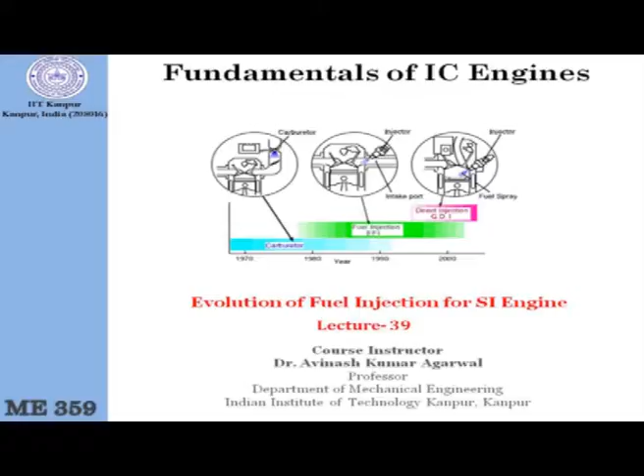Good morning. Today I want to discuss the evolution of fuel injection systems, especially for spark ignition engines. In this lecture we will discuss the conventional fuel injection system that we have been using for almost a century now, the carburetor, and then the evolution into the next generation, the port fuel injection system, and then the latest addition to this series, the gasoline direct injection system. So today I will be covering some of these aspects.

If you look at the history of fuel injection system development, the people who designed IC engines in the beginning, Nikolaus Otto and others, always had this dream that we could inject gasoline directly into the engine cylinder, which would help achieve very high efficiency similar to diesel engines, and also cater to very high power output from the petrol engine. But that did not happen because petrol requires more time to evaporate in the combustion chamber, and its auto ignition temperature is also very high.

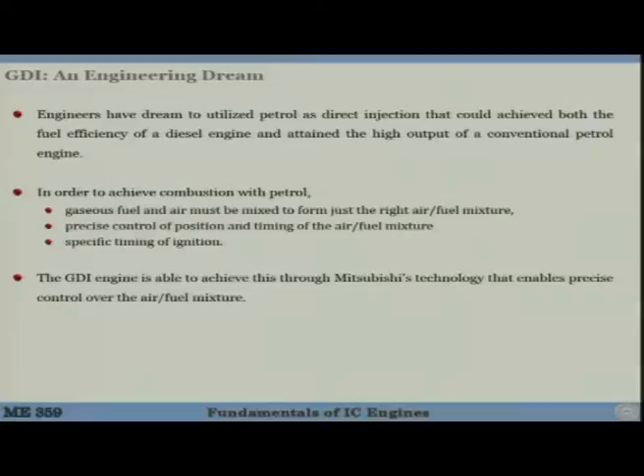So in order to achieve combustion with petrol, what is required is to mix the fuel and air to form just the right quantity of fuel-air mixture, control the timing and position of the air-fuel mixture in the combustion chamber, and then at the right time apply the spark. This had to be done, and for almost 100 years we could not do it due to a variety of issues. It became possible only in the last 20-25 years, when a lot of electronics was introduced, making it possible to achieve control over all these processes.

Mitsubishi company from Japan is one of the lead companies which developed this technology, and they are the pioneers. After that, of course, there are a lot of other automotive companies which have developed one or other variant of this technology, and we will be looking at some of these aspects.

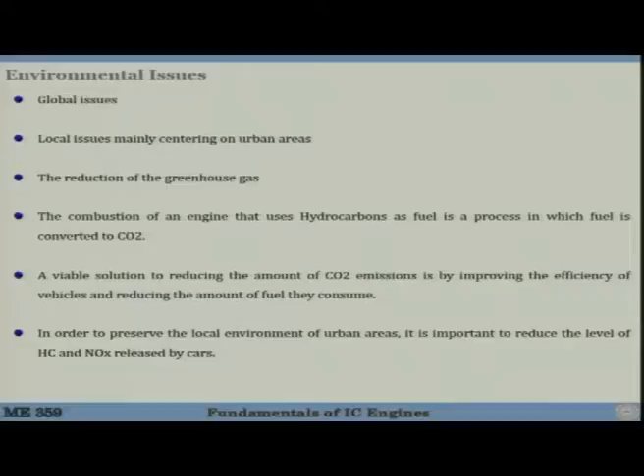Coming back to general aspects, there are many global issues and many local issues related to pollution. There is a requirement for greenhouse gas reduction, and when we talk about greenhouse gas reduction from gasoline engines, we always talk about increasing fuel efficiency, so that for the same kilometer travel you burn less fuel, and therefore put lesser carbon dioxide into the atmosphere from combustion of hydrocarbon fuels. So any efficiency improvement initiative for increasing the thermal efficiency of gasoline or diesel engines helps address global GHG emission issues.

It also helps address local pollution issues, because an engine running efficiently will put out lesser carbon monoxide, lesser hydrocarbons, and lesser NOx into the atmosphere. If you can achieve reduction of all these three by making an efficient engine, you address not only local issues but also global issues, and GDI technology addresses both of these to a large extent in SI engines.

Coming to CO2 reduction, there are many technologies available that enable major reduction in CO2, but sometimes these technologies require a very heavy engine, or many additional subsystems that need to be incorporated. When you manufacture those components or subsystems, you end up putting more carbon dioxide into the atmosphere than they will save over a lifetime, and you also put in a lot of CO2 when those components are recycled at end of life. That is one major issue, and GDI engine does not require any major alterations.

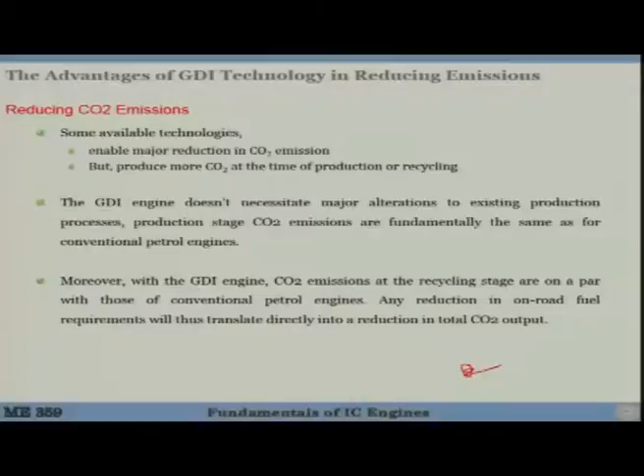So you are putting less amount of CO2 into the atmosphere during the usage time. That way you can actually reduce a significant amount of CO2 being put into the atmosphere. Then there is the issue of reducing carbon monoxide, hydrocarbon, and NOx emissions.

As I said, Mitsubishi company is developing the GDI and they are meeting the most stringent emission norms. They use a lot of features incorporated in the GDI engine, which enable a huge reduction in carbon monoxide, hydrocarbon, and NOx emissions.

Some of these features include earlier activation of the catalyst by two-stage combustion. We all know that gasoline engines have a three-way catalytic converter, and it requires a certain light-off temperature to get activated before it starts reducing HC, CO, and NOx emissions. With a GDI engine, you do two-stage combustion, and the light-off temperature is obtained very quickly, relatively much more quickly than conventional engines. So you are putting out cold start emissions to a much smaller extent compared to conventional engines.

That is one part. The second part is that you increase the exhaust gas temperature and design the exhaust manifold so that it decelerates the flow. There is more time available for hot gases to do heat exchange with the catalyst, which maximizes this effect. Then you put a high volume EGR, and EGR reduces the peak temperature inside the combustion chamber, so NOx formation reduces. Whatever small amount of NOx forms, you take care of it using a lean NOx catalyst.

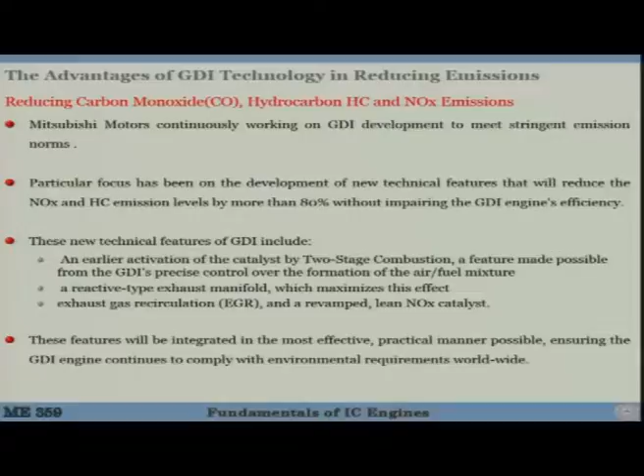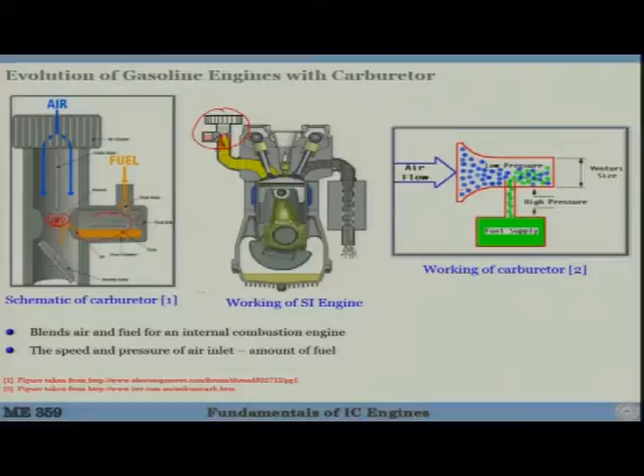When lambda is 1, it is a stoichiometric mixture. When lambda is less than 1, it is a rich mixture, and when lambda is more than 1, it is a lean mixture. So most conventional car engines use port fuel injection technology.

Now the trend is that, in order to generate more power more efficiently, you try to put in leaner mixtures at high pressure. So you use a lean burn engine with turbocharging in order to control emissions and to get higher thermal efficiency.

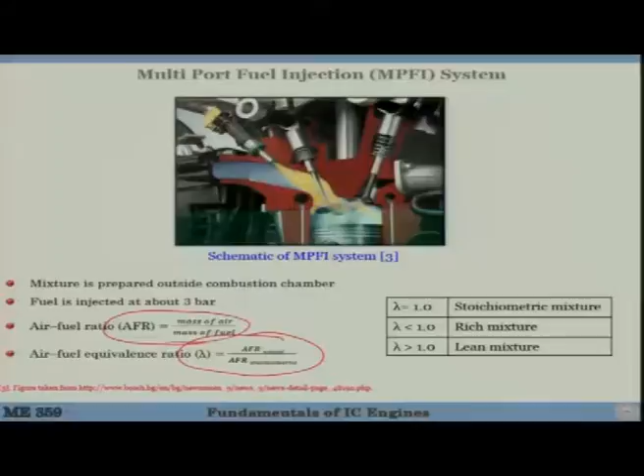Then around 2000, gasoline direct injection technology emerged, where gasoline is directly injected into the cylinder using an injector. This technology was developed by Mitsubishi, and now a large number of cars in the world, unfortunately not so much in India, are using gasoline direct injection technology.

To reiterate, in a carburetor, fuel comes in through a float chamber, air is coming in, and this works on creation of vacuum in the intake manifold. In the port fuel injection system, you inject the fuel in the manifold, and when the intake valve opens, the air fuel mixture comes in. In a GDI engine, the fuel is directly injected into the combustion chamber, only air is taken in through the intake valve. This is the subtle difference between these three systems.

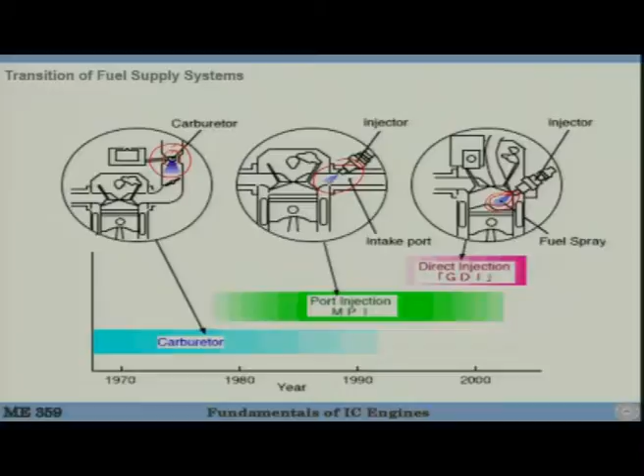Now let us compare these three systems and the progress made over the period. Here you see the air fuel ratio - this is the rich side and this is the lean side. Obviously you would like to move into the lean direction, and when you move that way you also move in terms of fuel economy. So here you have higher fuel economy, here low fuel economy, here high fuel economy.

This is where the carburetor is - it works either on the rich side or very close to stoichiometric, and its fuel economy is not very good. Port fuel injection improves the air fuel ratio, working on leaner mixtures and giving better fuel economy. Diesel engines operate on overall very lean mixture and give much better efficiency, but the GDI engine, which operates on gasoline, actually has a much leaner mixture overall, and gives efficiency as high or even better than diesel engine.

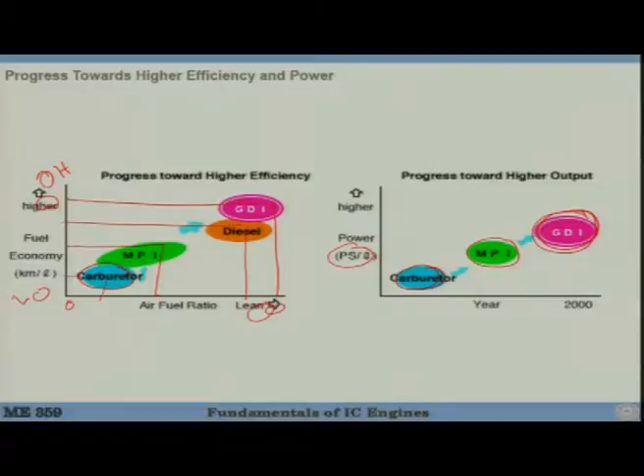Coming to power output, you can see 1980s carburetor power per liter - how much kilowatt or BMEP you can generate - and then here you have port fuel injection. The per liter power output from an MPFI engine is actually much higher than carburetor, and the GDI engine, in spite of being more efficient and using lean mixture, is able to give more thermal efficiency and more power output. So this is a win-win situation - you are not losing on any of the fronts required.

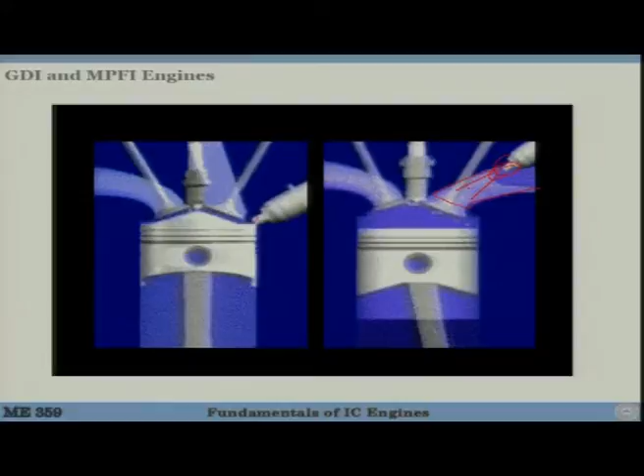This is another figure which shows the difference between PFI and GDI. In PFI you have this intake port here and the fuel injection is done in the intake. This is the GDI engine - there is a cavity here and the spray is done when the piston moves down. So this is the subtle difference between GDI and PFI engines.

Now this animation shows clearly what happens. When the intake valve opens, only air is taken in, and you can see a very peculiar shape of piston that rotates and changes the direction of the intake air. The direction changes, and while it's changing you inject the fuel at that time. So the fuel along with the air moves and gets concentrated very close to the spark plug, forming the mixture right in the vicinity of the spark plug.

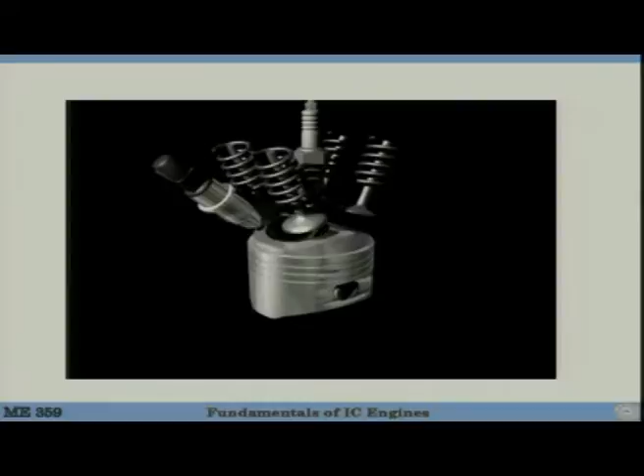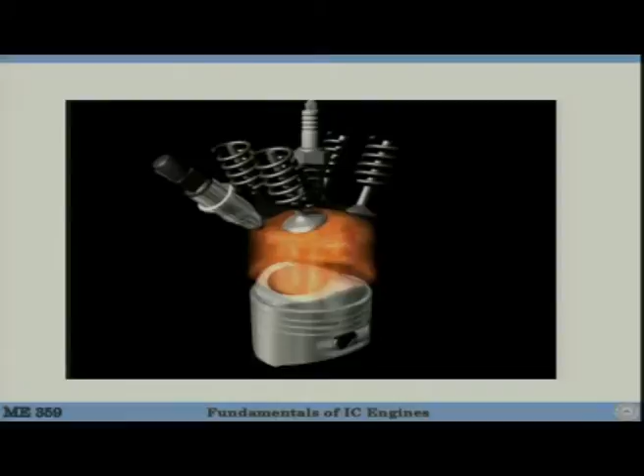The spark is applied, and the rest of the areas are deprived of fuel. So overall it is a very lean mixture, but very close to the spark plug you have just the right mixture at the right time. When you apply the spark, combustion takes place, and this animation shows in practice how the GDI engine actually works.

Okay, so if we look at the current status of the gasoline direct injection engines, they are extremely popular in the road transportation system because of the advantages they offer.

GDI engines are more powerful, GDI engine fuel economy is better, GDI engines emit lesser carbon dioxide, carbon monoxide, hydrocarbon, and NOx emissions, and their weight is similar to conventional engines. So what more can you ask for? These are the reasons why GDI engines or variants of GDI technology are very popular in the road transportation sector, especially for the car segment, mid-size segment.

Carburetor and manifold systems, as I mentioned earlier, work more or less on stoichiometric or close to stoichiometric mixtures. But the GDI engine works on a very lean mixture overall, giving very high efficiency and high power output, while close to the spark plug the mixture is rich.

The GDI engine actually runs on two different modes. One is the stratified mode. When operating under lean conditions, or when you want less power output from the engine, you inject a very small quantity of fuel toward the end of the compression stroke. It concentrates very close to the spark plug, and as a result, with very little fuel you generate part power output. So on all part load conditions, stratified charge operation is used.

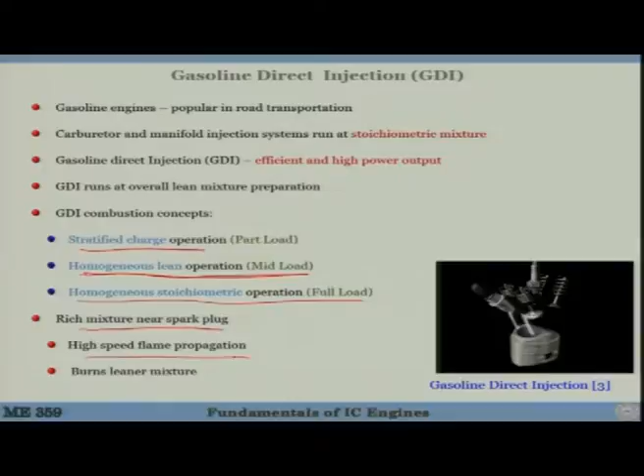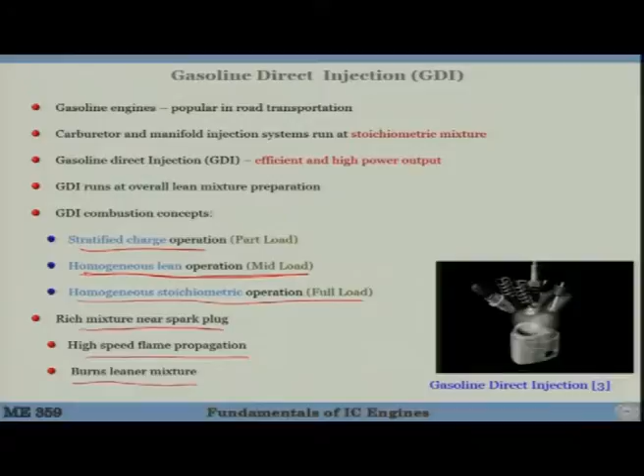There is a rich mixture very close to the spark plug, causing high speed flame propagation, while in other areas you burn a leaner mixture. So very close to the spark plug you have a rich mixture, and around it there may be either no fuel or very little fuel, forming lean mixtures.

If you look at the schematic, there are many types of gasoline engines. Here, this is a centrally located injector, and you can see the fuel is injected directly into the cylinder, so mixing takes place in the combustion chamber. Overall mixture strength can vary from lean, which gives very high efficiency, to almost stoichiometric, which gives high power output. Formation of carbon monoxide, HC and NOx is very low from the gasoline direct injection engine.

Fuel injection pressure is much higher than in a port fuel injection engine. In port fuel injection, fuel is injected at 3 bar. In a GDI engine, it varies from 50 bar to 200 bar. In a common rail direct injection diesel engine, injection pressure ranges up to 1600 to 1800 bar. So compared to diesel this is much less, but compared to gasoline port fuel injection, this is much higher.

Here, the best part is that you actually use the motion of the air, which could be swirl motion or tumble motion inside the engine, generated because of the special geometry of the intake manifold as well as the geometry of the piston. This helps in achieving the objective of formation of a homogeneous mixture, especially at full load conditions.

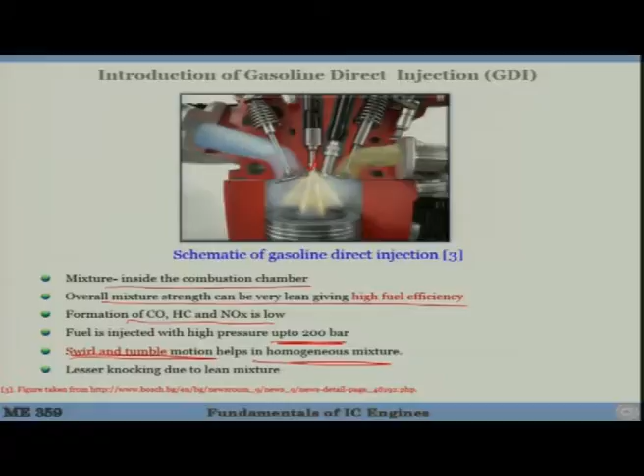So in the combustion chamber of a GDI engine, you either have a rich mixture or a lean mixture, you do not have a stoichiometric mixture. The possibility of knocking is highest in a stoichiometric mixture. Because of this reason, a homogeneous lambda equal to 1 mixture does not exist; it is either lambda less than 1 or lambda more than 1. So the possibility of knocking is actually much less here.

Okay, so if you look at these different variations of GDI engine design, there are a few shown here. As I mentioned, when the piston is coming up at the end of the compression stroke, you are doing fuel injection. This condition is stratified charge, meaning you are operating the engine in part load condition.

Homogeneous charge means when the piston is going down, you inject the fuel and have a lot of time available for mixing throughout the combustion chamber, forming the homogeneous mixture. This kind of condition is used for catering to high load conditions.

There is a spray-guided design engine combustion chamber where you have a spray and your spark plug is located very close to the spray. Then there is a wall-guided GDI engine system where the wall of the piston and cylinder guides the spray to come very close to the spark plug. And then there is air-guided design, where air motion, the swirl motion and the tumble motion, helps the fuel come very close to the spark plug. So these are the main different types of combustion chamber designs for GDI engines.

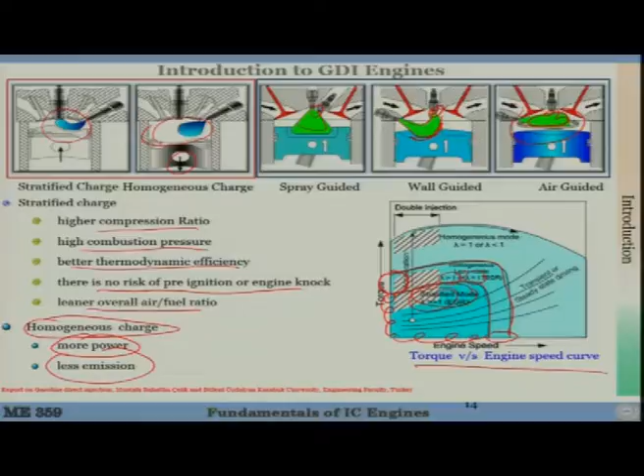And then if you want to operate the engine at further higher speed with more torque expected, you have no choice but to go for homogeneous mode where you do intake stroke injection. You can also sometimes use double injection. Here lambda is 1, or sometimes if you want to really produce a lot of power, lambda can be less than 1. That means you will put in less amount of air and more amount of fuel, so lambda will be less than 1, meaning the mixture will be rich.

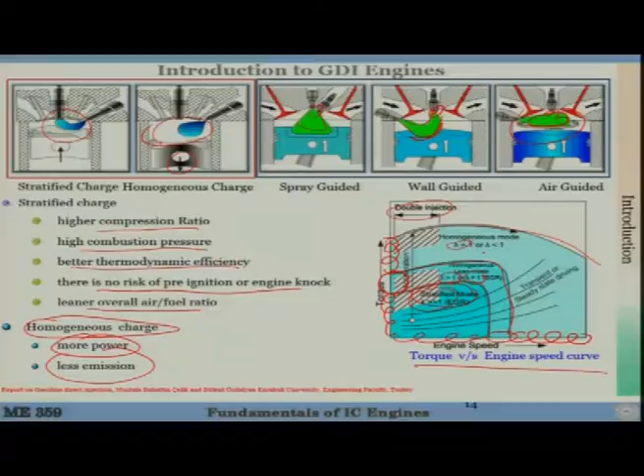So as I said, this is the same curve explained earlier: engine speed on one axis, engine torque on the other. Here you have less fuel consumption because the mixtures are lean. Overall air-fuel ratio can be as high as 30 to 40. If it were a homogeneous mixture, you couldn't expect the engine to run, but since it's a heterogeneous mixture, doing end-of-compression-stroke injection very close to the spark plug, the fuel-air mixture gets concentrated there. That's why, in spite of the overall ratio being 30 to 40:1, you are able to operate.

In the superior output mode, you need high power and high torque, so you are doing intake stroke injection, and here the air-fuel ratio can vary between 13 to 24. 15 is the stoichiometric mixture. So you can see, if it is homogeneously lean, it could be 24 for catering to mid load, mid speed conditions. If it is full load, full speed, it will be 13 to 18 air-fuel ratio.

Now, compared to GDI engine, compared to PFI engine, the GDI engine has much better volumetric efficiency, and that also helps us in getting more power output. Here the curve shows engine speed on the x axis, volumetric efficiency on the y axis.

You are injecting the fuel in the port, and so this is the volumetric efficiency of the conventional port fuel injection. In a GDI engine, what happens is that when you are either in the intake stroke or at the end of the compression stroke, you are injecting the fuel directly in the cylinder. It is in liquid form, and once you inject the fuel, it has to vaporize, and once it starts vaporizing, it will absorb latent heat of vaporization, and it will bring down the charge temperature.

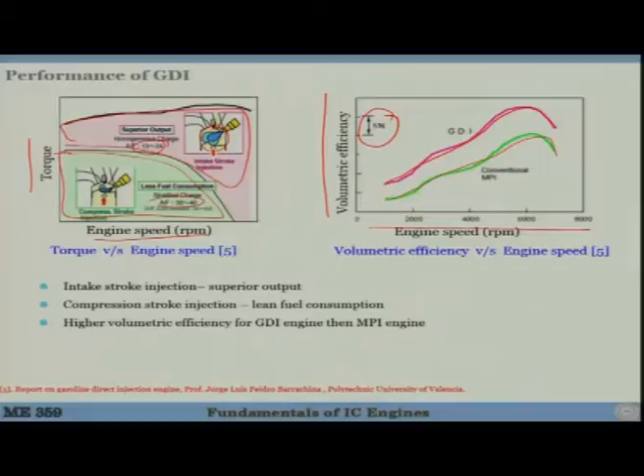So these are all positive things, but there are certain limitations also. The limitations include that there is sometimes difficulty in finding space for an injector to be mounted in the head. If you have a 4-valve design, in each cylinder head you will have 2 intake valves, 2 exhaust valves, 1 spark plug, and on top of it you have to find space for 1 extra injector, and that can really be challenging. You can find that space very easily in 2-valve per cylinder engines, but in 4-valve per cylinder it could be a little bit of a problem, and so head design becomes challenging.

Because of the challenging head design, you will be adding cooling issues. So cooling of the cylinder head will be challenging, casting of the cylinder head will become more complicated, and there are more refinements required for idling, and there is greater need for control of emissions, because most of the GDI engines are expected to meet Euro 6. So emission control has to be perfect.

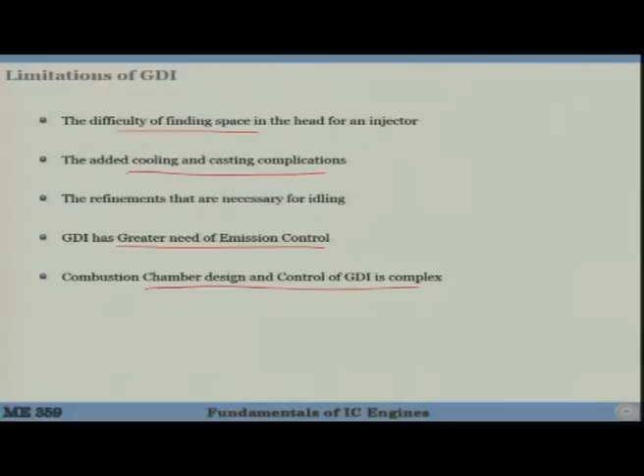Combustion chamber design and control of GDI is rather complex, because it is very difficult to manage GDI kind of combustion without the use of sensors. You need a very huge suite of sensors and ECU.

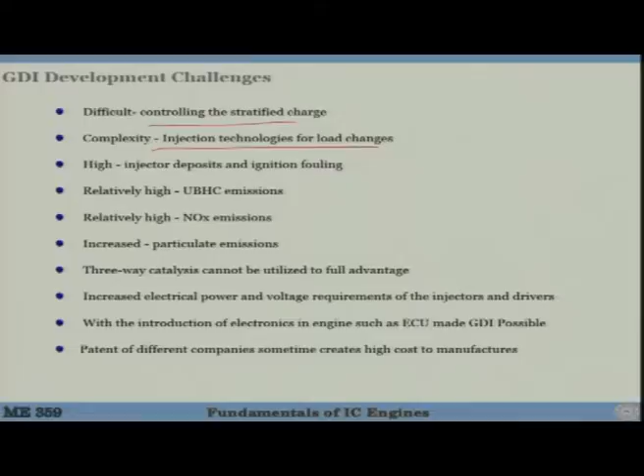So the development challenges of the GDI include difficulty in controlling the stratified conditions. It's complex injection technology, where the injection pattern changes with load changes in low speed and low power conditions. You are actually injecting during the end of the compression stroke. In high load and high speed conditions, you are injecting during the intake stroke. So this injection timing becomes dependent on how much accelerator you are pressing, and that makes this whole control more complex.

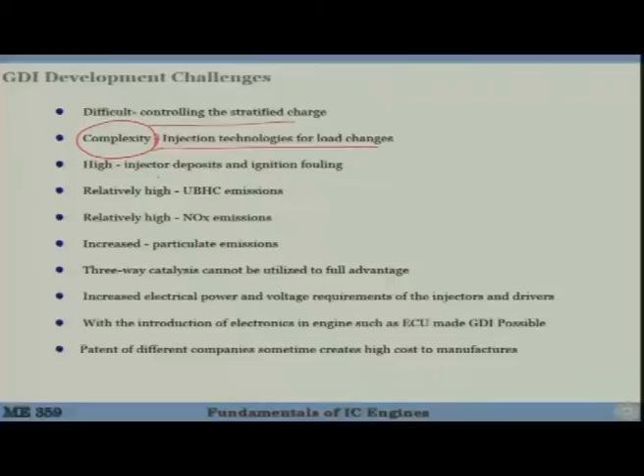You are injecting the fuel in liquid form inside the cylinder, so the injector really remains cold, and rest of the things inside the combustion chamber are hot. So there is a thermophoretic pressure on all the particles that are generated. They deposit on the injector, and there is a lot of problem with injector deposits, and sometimes even if you have liquid droplets going into the spark plug, the spark plug can actually get fouled, so if you don't design your system properly, you may end up fouling the spark plugs quite frequently.

There could be a problem of unburnt hydrocarbons. If you don't design it properly, the NOx emissions could be high, and obviously since you are putting a lot of fuel and there are fuel rich regions inside the combustion chamber, particulate emissions from gasoline direct injection could be a real problem. You will be amazed that PFI and carburetor engines do not have a problem with particulates, but in the case of GDI engine, particulate emissions is a real challenge to tackle, and this is probably one of the biggest challenges.

All other things are very easy to control, but this is quite challenging. Three-way catalysis cannot be utilized to full advantage, this is also one of the challenges. You have increased electrical power and voltage requirements for injectors and drivers, because everything has to be electronics controlled. With the introduction of ECU and electronics in the engine, GDI engine is possible, but that makes it quite complex.

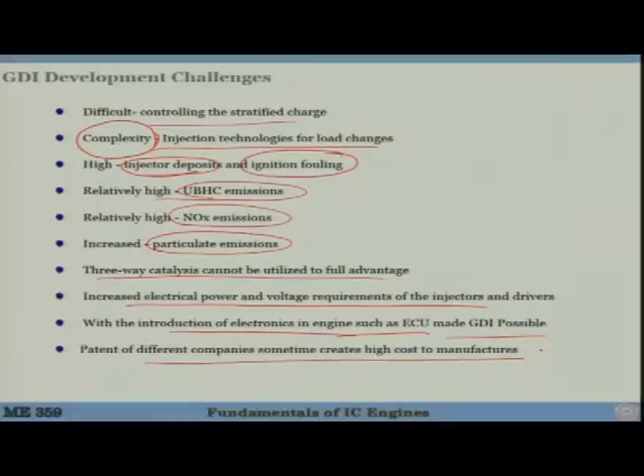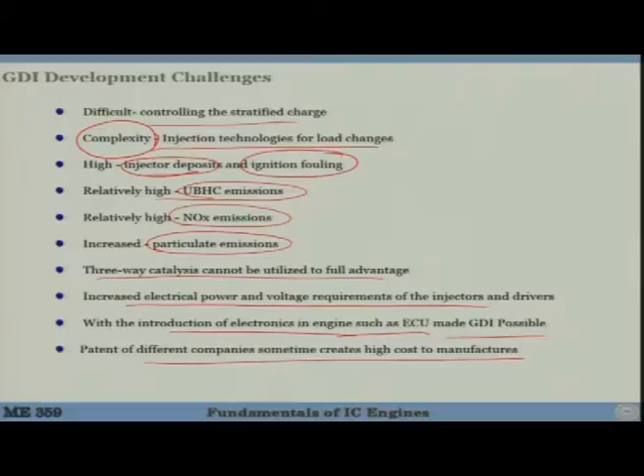Mitsubishi has most of the patents, but other companies are also filing their patents. If you want to develop this technology on your own, either you have to lease the patents from other companies, or you may get into a conflicting situation with them, which will increase the cost of manufacturing a GDI engine if you have to pay very high fees for patents. So this is one of the limiting factors.

The major objectives of the GDI engine are: first, you want ultra low fuel consumption compared to even diesel engines. The GDI engines have to be much more efficient, and you also want superior power compared to PFI engines. So these are conflicting goals - you want to get more power output, but you do not want to invest so much energy. You want the fuel consumption to be further lower on a per kilowatt hour basis.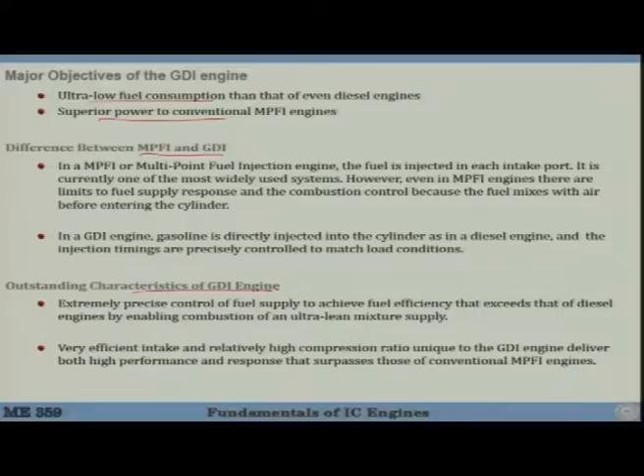I have already explained the difference between MPFI and GDI very clearly, and also explained the features of GDI, so I will skip that. Now let us look at how we really make this happen at a technical level. I will explain the distinguishing features of GDI which make this whole concept possible. As I said, there are two combustion modes.

The first mode is stratified charge mode, also called ultra-lean combustion mode. The second mode is homogeneous charge, called the superior power output mode. Under normal driving conditions, when you just started the engine or when you are running at low load, low speed conditions, you want to operate on ultra lean mode. That means you do the injection of fuel towards the end of the compression stroke.

For superior power output mode, when you are accelerating or going on a highway at very fast speed and need more power output, you inject the fuel during the intake stroke and form a homogeneous mixture. This is very similar to what you see in a port fuel injection engine. The only difference is that you will produce more power than a PFI engine.

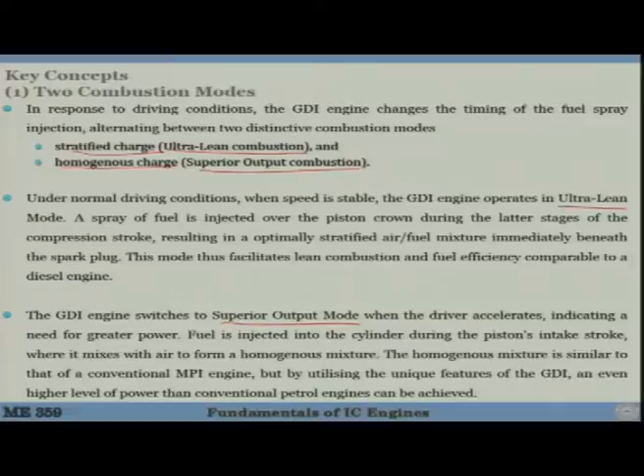The reason is that you are injecting the fuel directly in the cylinder, which cools the charge, and as a result the charge density will increase, and you will be able to put more fuel-air mixture into the cylinder. From the same cylinder volume you will actually get much higher power output in a GDI engine.

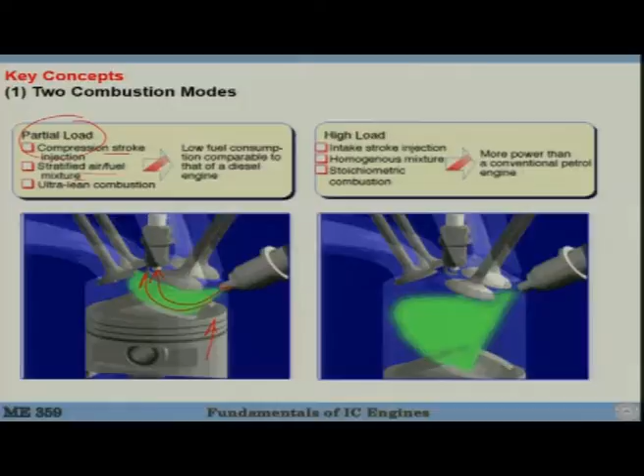This figure explains it. Here you are dealing with part load condition. As I said, you inject the fuel during the compression stroke, giving you a stratified fuel-air mixture. The piston is moving up, you are injecting the fuel very close to the spark plug, and it gets concentrated. Other regions of the combustion chamber do not have any fuel. Overall, if you look at it, it is ultra lean combustion, but in this zone you have sufficient fuel-air mixture. Combustion takes place here, and this gives you enough power to cater to low power, low speed output needs.

But you are actually consuming very little fuel, because there is hardly anything - you are not filling the entire combustion chamber with fuel-air mixture, unlike in a port fuel injection engine. That makes it extremely low fuel consumption compared to a PFI engine.

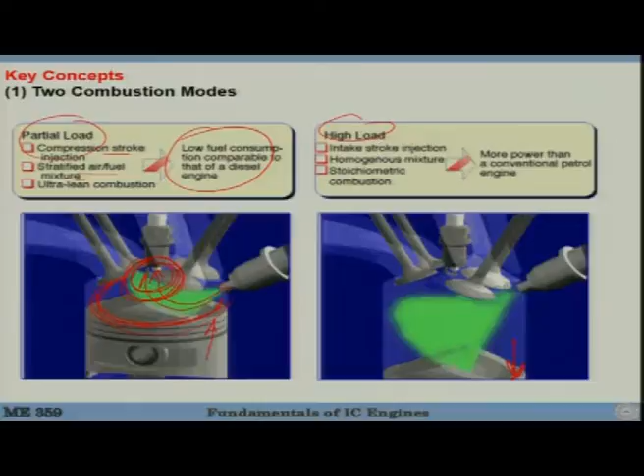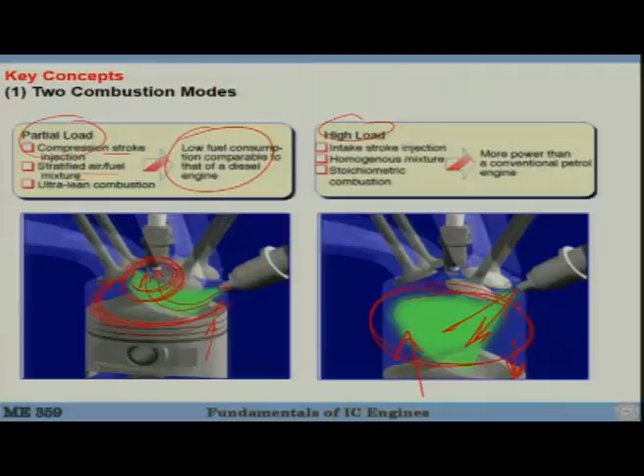In high load conditions, you are doing intake stroke injection. That means when the piston is going down, your injection starts, and then the piston starts coming up. This whole volume is filled with homogeneous mixture, close to lambda equal to 1, leading to stoichiometric combustion. Because of the increase in volumetric efficiency, you are able to get more power output than a conventional engine.

You are actually able to control precisely the air fuel mixture much better than a carburetor engine, because of the use of a concept called wide spacing. That means the injector and the spark plug are quite at a distance. So when you do the injection, there is a quite a distance, and this distance allows you to control the air fuel mixture strength. So injection of the fuel spray occurs farther away from the spark plug than in a conventional petrol engine, and it creates a wide space that enables optimum mixing of the gaseous fuel and air, and therefore you are able to control the fuel air mixture strength.

So in stratified combustion, fuel is injected towards the curved top of the piston rather than towards the spark plug, and during the later stages of the compression stroke, the movement of the fuel spray, the piston head's deflection of the spray, and the flow within the cylinder causes the spray to vaporize and disperse. So you have the piston like this, the fuel is injected, air is moving in this direction. Along with the air the spray moves, and since the air is hot at the end of the compression stroke, the spray vaporizes, disperses, and this results in a fuel air mixture of adequate strength, which is then carried to the spark plug, and then spark is applied.

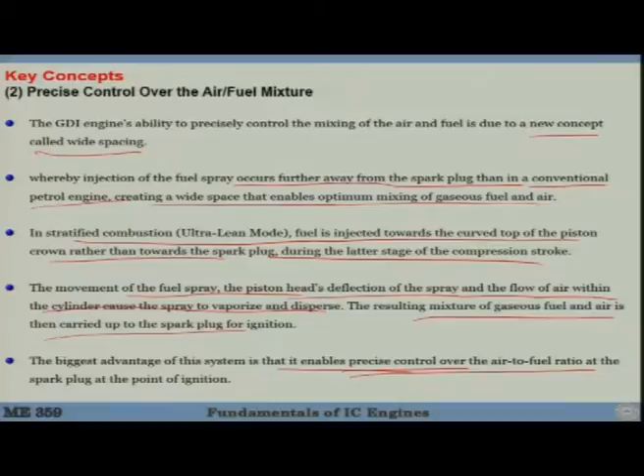So the biggest advantage of this system is that it enables precise control of the air fuel ratio at the spark plug, at the point of ignition. So you are essentially controlling, in the vicinity of the spark plug, the air fuel ratio. In other areas around it, the air fuel mixture is relatively much more lean, and that is what makes this GDI engine very unique.

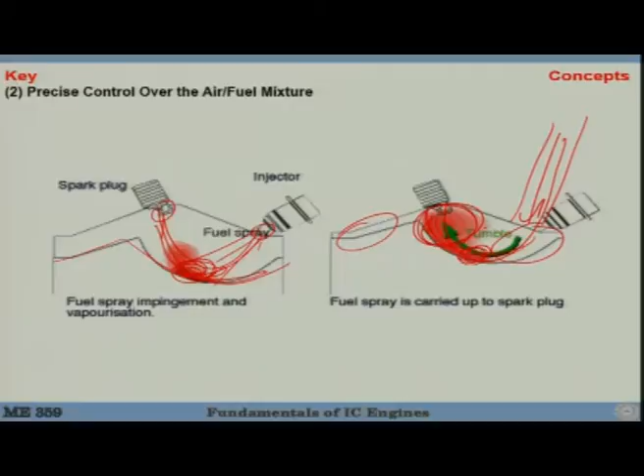So you can see here there is a lot of space between the injector and spark plug, and what happens is this piston is quite hot. So when the spray jet hits, part of it is wetted here, and this wetting of liquid fuel absorbs the heat from the piston and then it vaporizes. And because there is tumble motion also happening, due to the intake valve and the air moving, all this fuel that you have injected and has vaporized gets concentrated in this zone. The rest of the areas have no fuel, and that is what makes it very, very efficient. It gives you better fuel efficiency.

This concept of wide spacing makes it possible to achieve a stratified mixture, and this makes the GDI engine more stable. Ultra lean combustion is realized, and it allows a significant improvement in fuel economy.

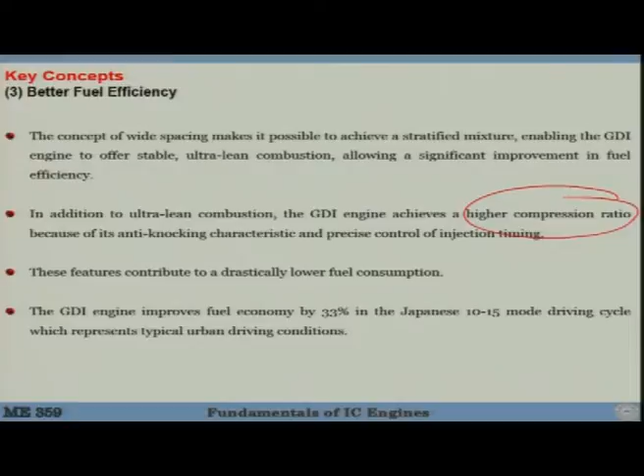In addition to ultra-lean combustion, the GDI engine achieves a higher compression ratio. As I said, in the GDI engine, you are either dealing with a relatively richer mixture or relatively leaner mixture, and both of them avoid knocking. Therefore you can use a higher compression ratio without the fear of knocking, and get even further improvement in thermal efficiency and fuel economy.

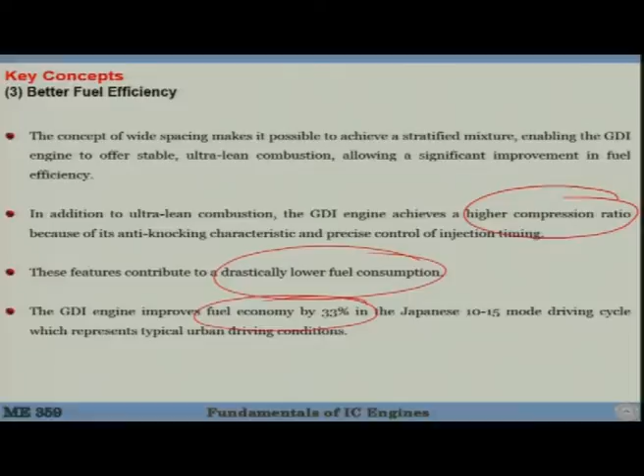So these features actually reduce fuel consumption. In fact, to quantify it, the fuel economy of the GDI engine is 33% or more better than a comparable port fuel injection engine, which is a significant improvement. So if a port fuel injection engine of 1.5 liters gives you 12 kilometers per liter, a GDI engine of the same capacity will give you 16 kilometers per liter, which is a significant improvement. You will also be reducing CO2 emissions by 33%. So this is what is shown here: 12 kilometers per liter from a PFI engine, and 16 kilometers per liter from a GDI engine.

In addition to fuel economy, there is improved power output from the engine. In high load operation, charge burns in homogeneous mixture mode, and the GDI engine functions just like any other port fuel injection engine, because you are doing the intake stroke injection, and everything is homogeneous just like PFI. But in spite of that, it achieves significantly higher power output. Why? Because when you inject the fuel during the intake stroke, you make the mixture much colder, due to vaporization of the fuel. The mixture becomes more dense because of the lower temperature, and as a result more fuel air mixture is taken in.

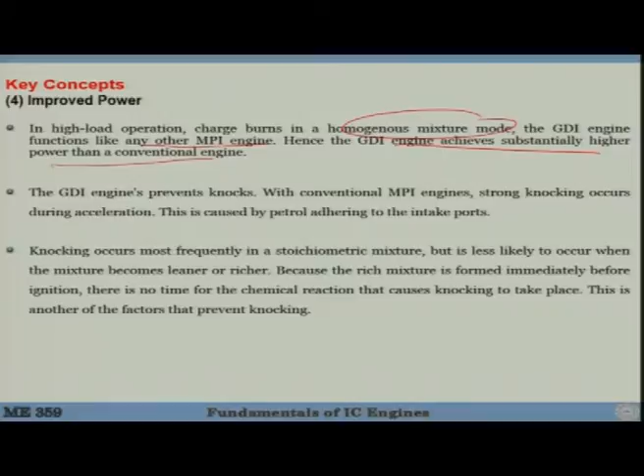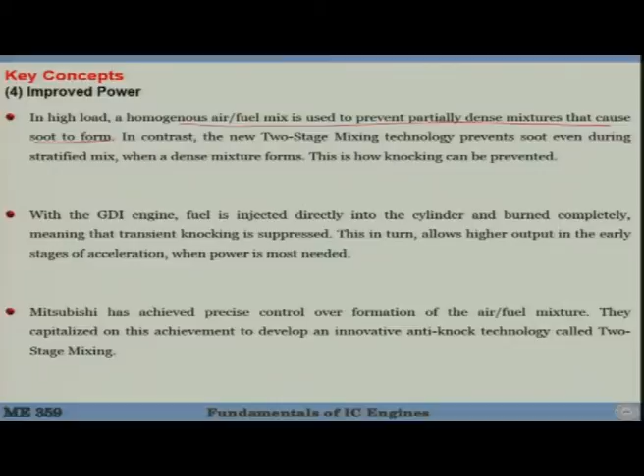Volumetric efficiency improvement takes place, and because of this improvement, the power output from the GDI engine also becomes higher, while preventing knocking. In high load conditions, a homogeneous mixture is used to prevent a partly dense mixture that forms soot. So knocking is fine, you get more power output, but when you have a very rich mixture close to the spark plug, you run into another trouble: soot formation. You've taken care of the knocking problem and the power output problem, but then you run into soot formation.

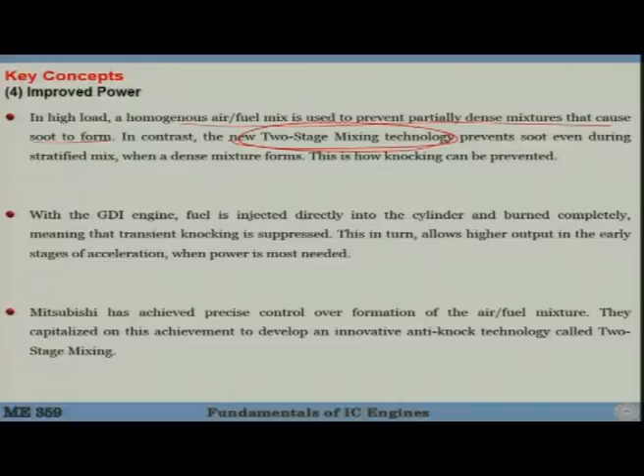This is actually taken care of by two-stage mixing technology. Let me explain what this technology is. Suppose you have to inject 20 milligrams of fuel to cater to certain load conditions.

In two-stage mixing technology, you will inject 5 milligrams during the intake stroke. This forms a very lean mixture which is not possible to burn on its own, but it is homogeneous all around the combustion chamber. The remaining 75% of the fuel you inject at the end of the compression stroke. When you inject it, combustion takes place, and everything gets concentrated very close to the spark plug. Power output takes place, but soot formation will also take place because this mixture is much richer than stoichiometric. You do not have enough air, so not all the hydrocarbons will burn—there will be partial combustion of the fuel, resulting in soot formation.

But this soot will then move to the neighboring area where you already have some amount of fuel available. When the soot moves, that mixture itself will not burn, but the air-fuel mixture strength increases, and the soot burns along with that fuel in the neighboring area. This is two-stage mixing: you mix the fuel in two ways, one-quarter during the intake stroke and three-quarters at the end of the compression stroke. This way you can suppress transient knocking, suppress soot formation, and get higher power output.

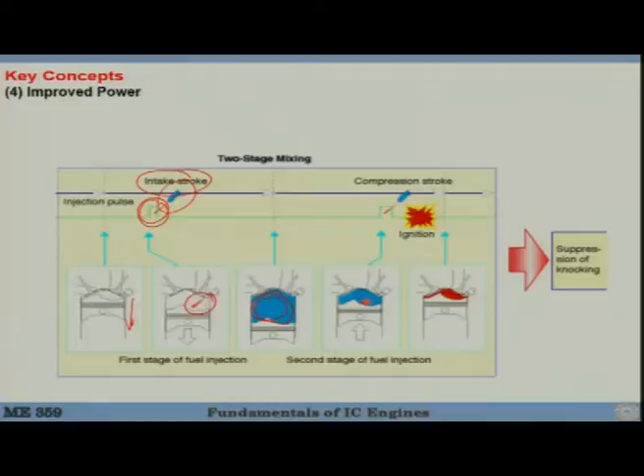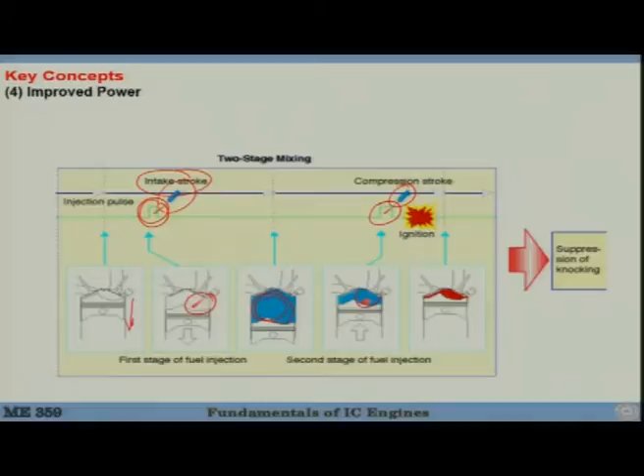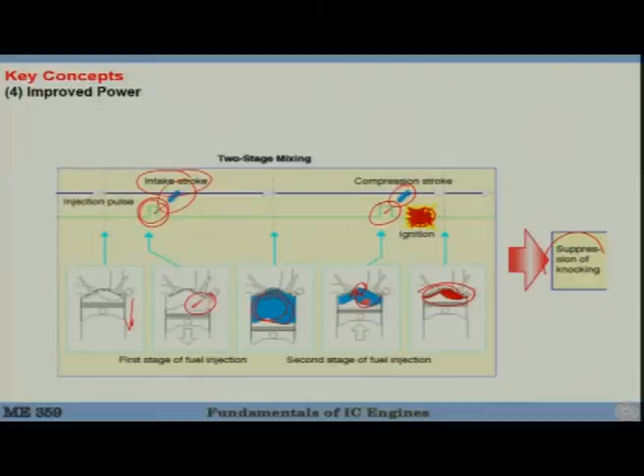So this is what is shown here. This is the intake stroke—piston is moving down, and one-quarter of the fuel is injected; you can see the pulse is very small. This fuel forms a very lean, homogeneous mixture inside the combustion chamber. Then during the compression stroke, at the end of it, another injection occurs where 75% of the fuel is injected. This fuel gets concentrated very close to the spark plug, and then you apply the spark. As a result, the whole combustion chamber gets ignited, leading to suppression of knocking and formation of less soot.

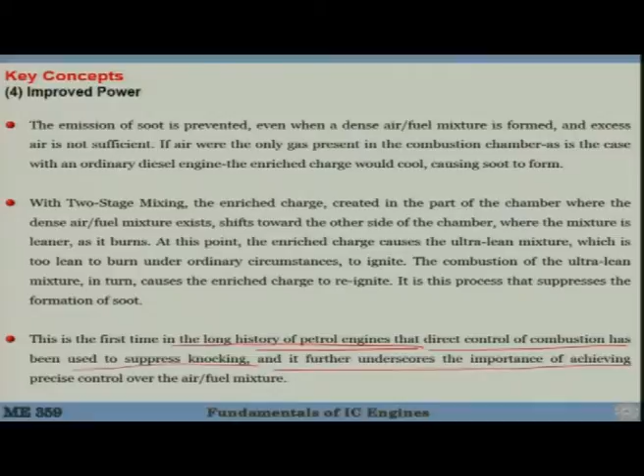If you look at this technology for directly controlling soot formation, this is the first time in the long history of petrol engines—125 years—that direct control of combustion has been used to suppress knocking. It further underscores the importance of achieving precise control of the air-fuel mixture in the engine. This is very important, and it is what is achieved by the GDI engine because of its electronic controls. So this is how suppression of knocking takes place.

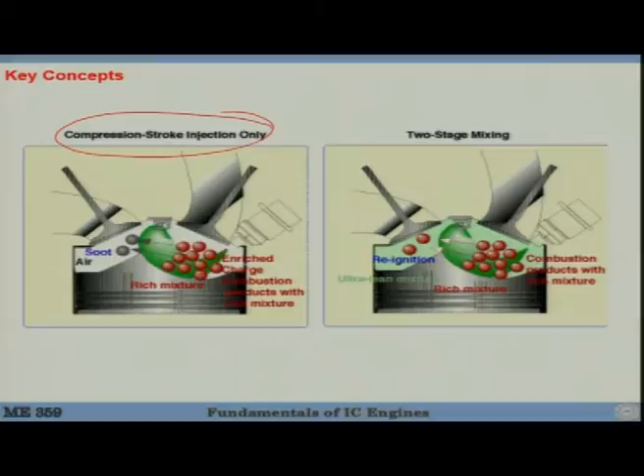This is the first case where you have only the compression stroke condition. As mentioned, 20 milligrams of fuel, for example, is injected here. This is the zone where the fuel-air mixture will be very rich; combustion takes place, but there is not enough air, so you will have formation of soot. This soot will move into neighboring areas, but it will not be able to burn because the amount of fuel in the soot is very little, and the composition will get frozen. Your engine will start giving sooty combustion, and you can see smoke coming out of a GDI engine in spite of its very good efficiency.

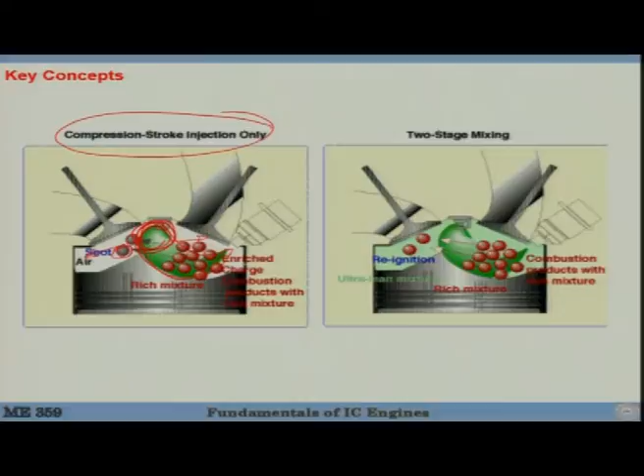This contrasts with the two-stage mixing concept which I explained, where most of the combustion chamber has a very lean, ultra-lean mixture present.

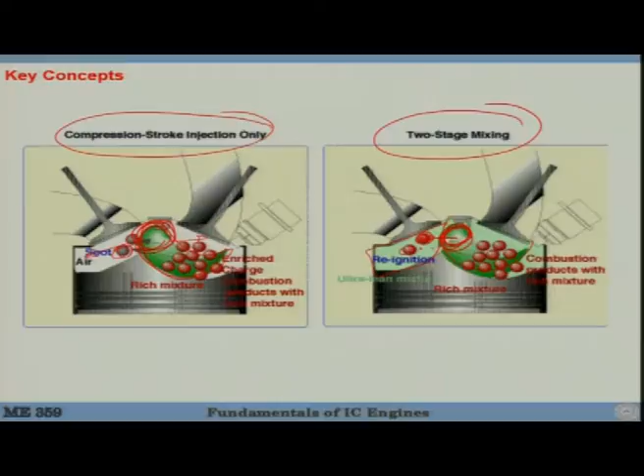You inject the remaining fuel. If soot forms, it will obviously form here because it is a rich mixture. It moves into this neighboring zone where already some fuel is present, more fuel comes in the form of soot, and this is where the reignition of the fuel air mixture will take place. So, this is as far as soot control is concerned.

But as I said, one of the biggest challenges automotive manufacturers face these days is emission compliance all over the world, including in India. In India now we are trying to go to Euro 6, Bharat Stage 6, and the emission norms are very, very tight, especially for HC, CO, NOx and PM emissions. If we want to introduce GDI engine technology in India, it has to comply with all existing emission regulations and also those coming in the future.

And for that, what do we need to do? We need to control all these 4 species. I have already told you how direct control of particulate formation can be done, but in spite of that technology, there will be some particulate formation, and for that you will probably need a gasoline particulate filter or some kind of particle filter to remove it. Now, this is one schematic which shows the engine.

So, this is a GDI engine. What you need to do is control HC, CO, NOx and PM. This can be done by two-stage combustion, which controls the formation of the air fuel mixture, as I mentioned. Two-stage combustion is a technology by which, when you start the engine, the exhaust gas temperature in the beginning is relatively very low, it could be 200 degree, 150 degree.

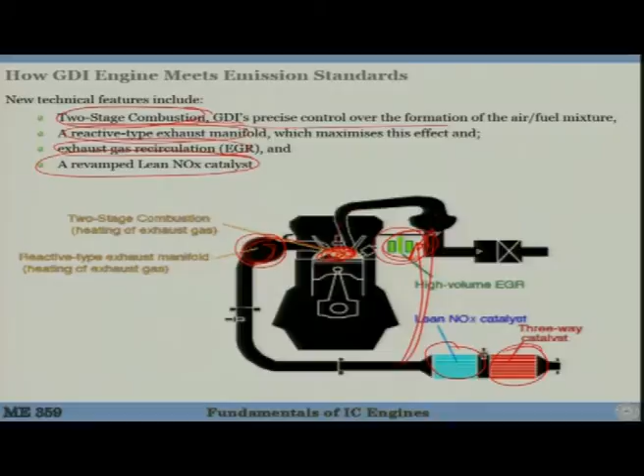Using all this, a suite of technologies can actually control all four types of pollutants coming out. If you look at reducing HC emissions, combustion occurs towards the end of the compression stroke and concludes at the beginning of expansion, by which time the gases in the engine rise to a very high temperature.

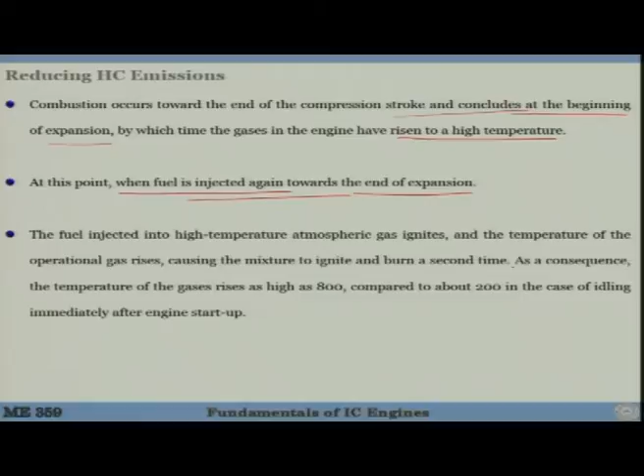At this time, the fuel is injected again towards the end of expansion or the beginning of the exhaust stroke. As a result, the temperature further rises, and gas temperature rises to 800 degree centigrade compared to about 200 in case of idling immediately when you start the engine from cold. So this actually helps increase the temperature.

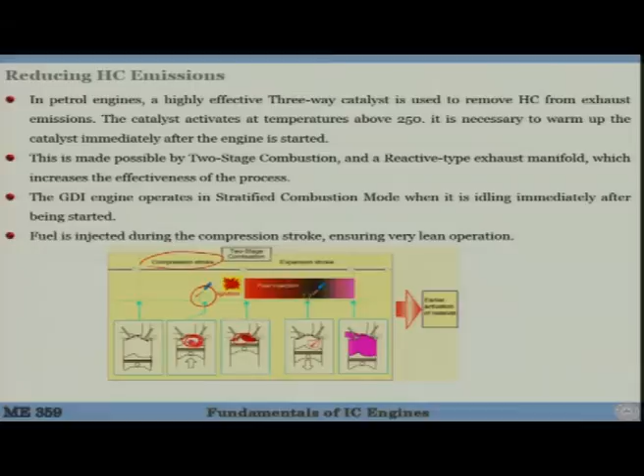So this is the two stage combustion. You can see this is the compression stroke, and you are injecting the fuel. Since you are just starting the engine, load requirement is low, and therefore you inject fuel at the end of the compression stroke. Combustion starts here and gets almost completed towards the end of the expansion stroke and beginning of the exhaust stroke.

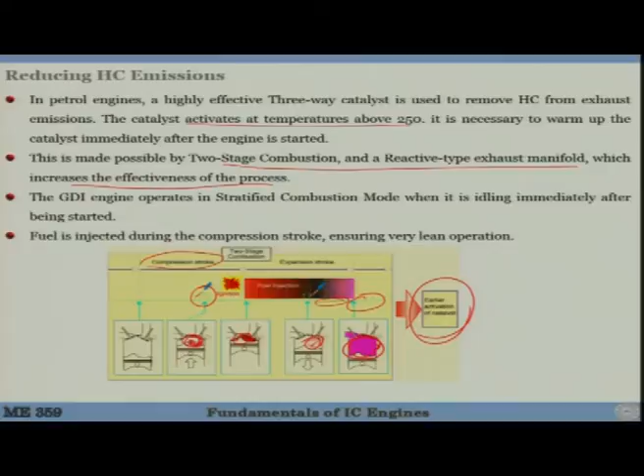You do another injection, which of course will not contribute towards power output, but it will heat up the exhaust gas, and because of this heated exhaust gas, activation of the catalyst will be very quick. Catalyst activation temperature for the three-way catalyst is approximately 250 degrees, and two stage combustion along with use of a reactive type exhaust manifold can increase the effectiveness of heating the catalyst, helping control HC and CO emissions to a great extent.

But in a GDI engine, you can go as high as 60% EGR, and as a result you can reduce as much as 90% NOx. So compared to conventional engines, NOx reduction is much higher from a GDI engine because of the use of very high volume of EGR. Such a high volume of EGR up to 60% is not possible in a port fuel injection engine, but in a GDI engine it is not at all difficult, it is possible.

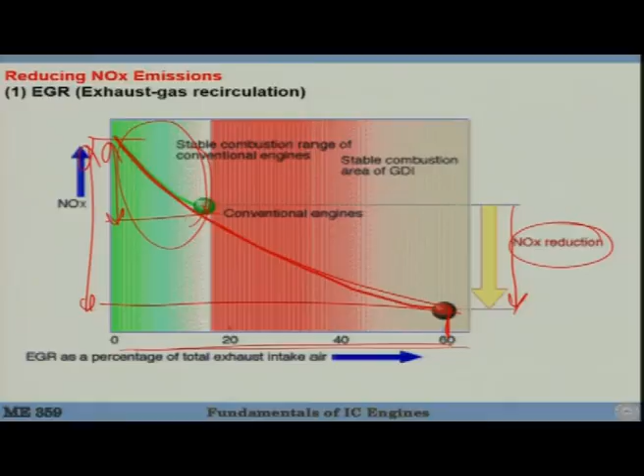So, using all these technologies, the GDI engine becomes extremely clean. You can control HC, CO and NOx because of the three-way catalytic converter. You can use another lean NOx trap to actually trap whatever NOx is formed. Then you can use in-cylinder control of particulate formation, and on top of it you can deploy a gasoline particulate filter to remove whatever small amount of particles have been formed.

So, in summary, the GDI engine emerges as a technology for the future, which has very high economy, much higher power output, and very low emissions of HC, CO, NOx and PM. This is one technology for the future for India, and it should be accepted by the Indian automotive sector wholeheartedly. This is the future.

You can reduce greenhouse gas emissions to a great extent, and you can increase fuel economy to a great extent. Thank you very much.